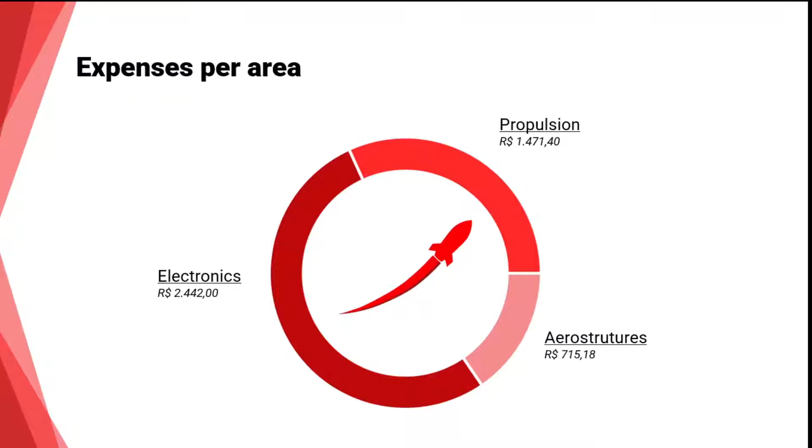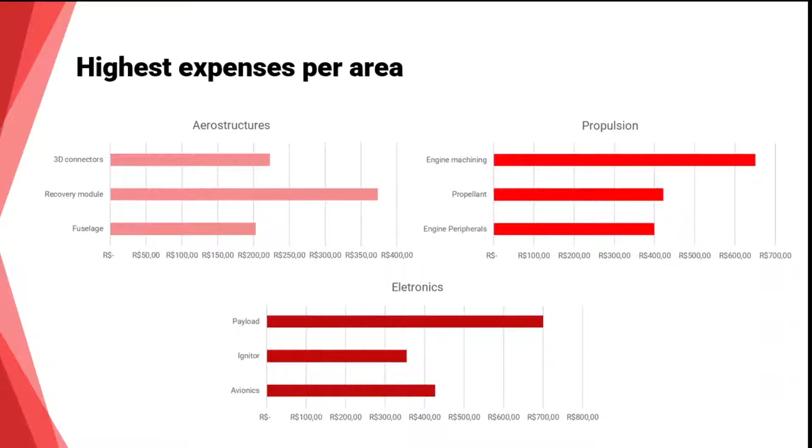The following graphics detail the biggest expenses per area: in aerostructures, recovery module, 3D connectors, and fuselage; in electronics, payload, avionics, and igniter; and in propulsion, engine machining, propellant, and engine peripherals.

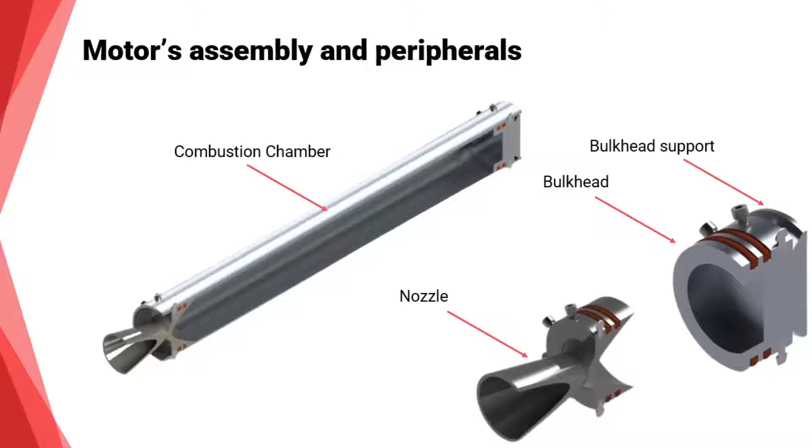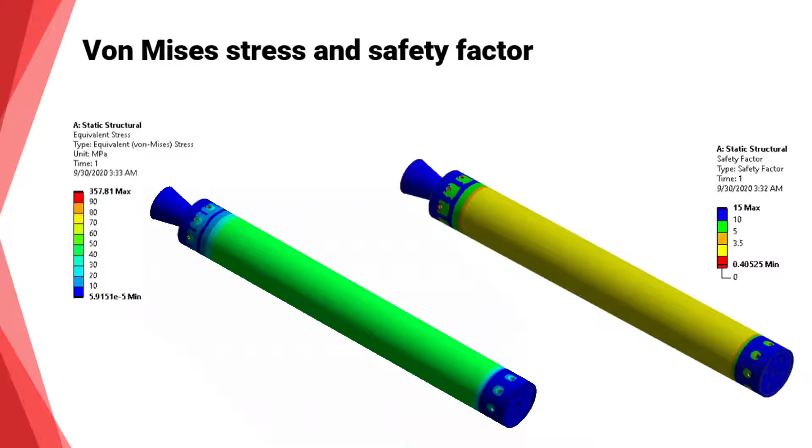In order to know the chamber's strength, a structural simulation was made. The results obtained were a von Mises stress of 49 megapascal in the chamber center, resulting in an average safety factor of 2.5 for maximum motor load analysis and considering internal pressure as 1.5 times the nominal.

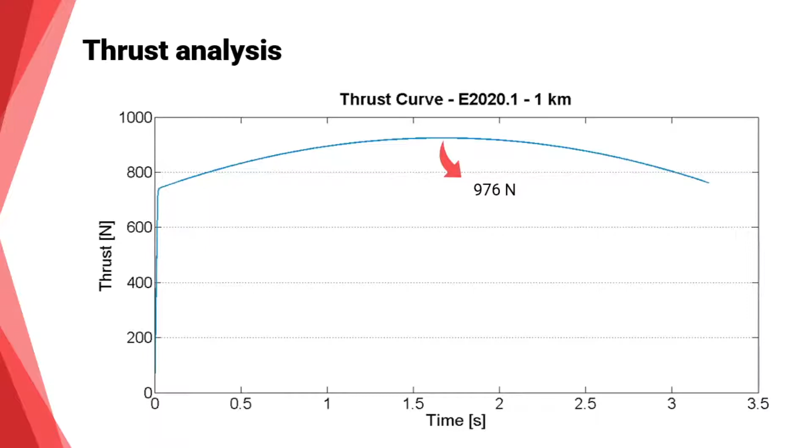The maximum thrust is 976 newtons, with an average thrust of 950 newtons and total impulse of 2,942 newton-seconds, thus a Class L motor. The maximum pressure found was 2.45 megapascal.

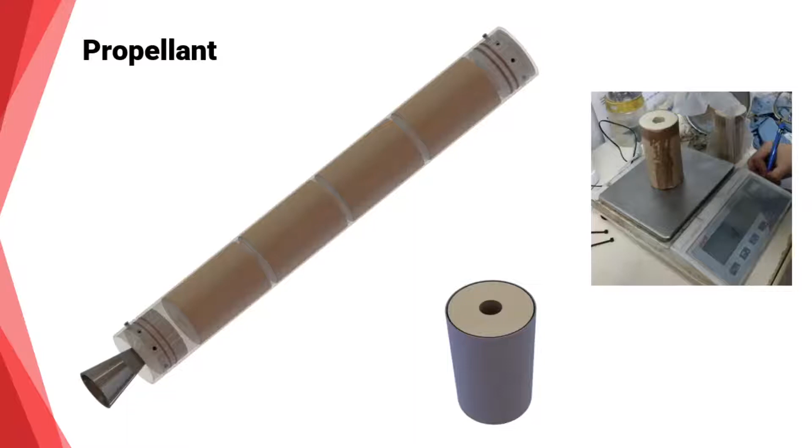The rocket has 4 grains, all with composition of 65% potassium nitrate and 35% monohydrate dextrose. This percentage is corrected by the factor 1.1 in mass due to hydration. The external face is inhibited with a cotton cloth and epoxy resin. The combustion chamber also has a thermal insulation element based on kraft paper.

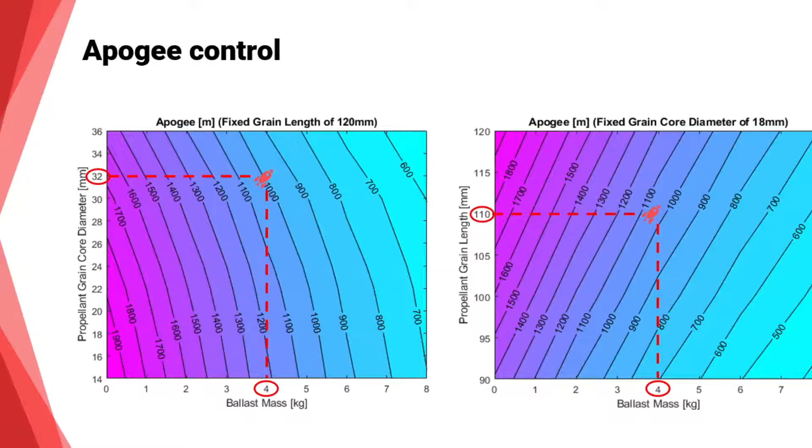A parametric study was carried out using OpenRocket and it was concluded that for 1 kilometer apogee, each grain has 110 mm length, 66 mm of external diameter, and 18 mm for core diameter, with a boilerplate payload of 4 kilos.

The team is at the beginning of the test schedule, with results just for a half-charge motor. The results for the first test were satisfactory, occurring without anomalies and demonstrating the combustion chamber's structural integrity. In this test, we used kraft paper as inhibitor.

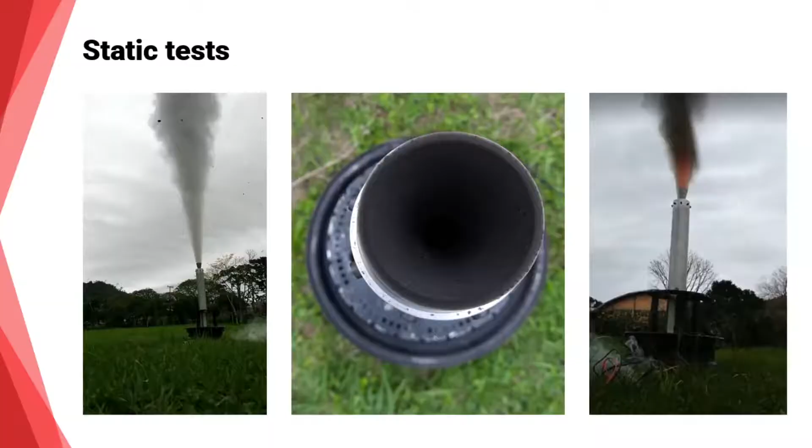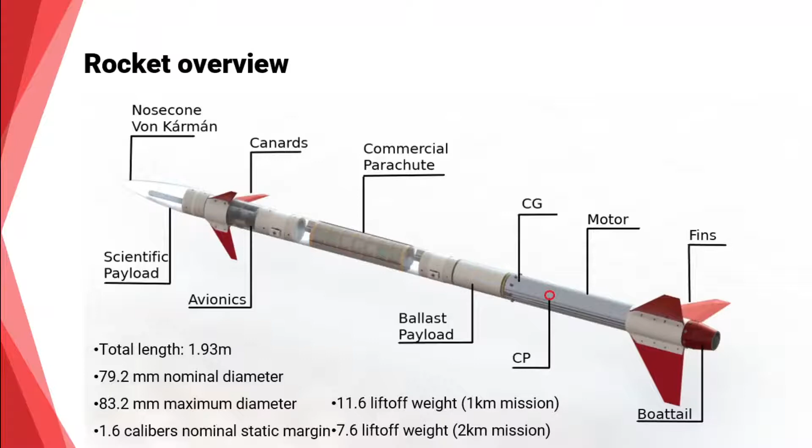A nominal static margin of 1.6 calibers was achieved with the help of 3 fins and 3 canards. The canards were chosen to reduce the static margin variation and improve the damping ratio, while combined with the main fins, maintaining a safe minimal static margin. The majority of its mass is concentrated in the propulsion module.

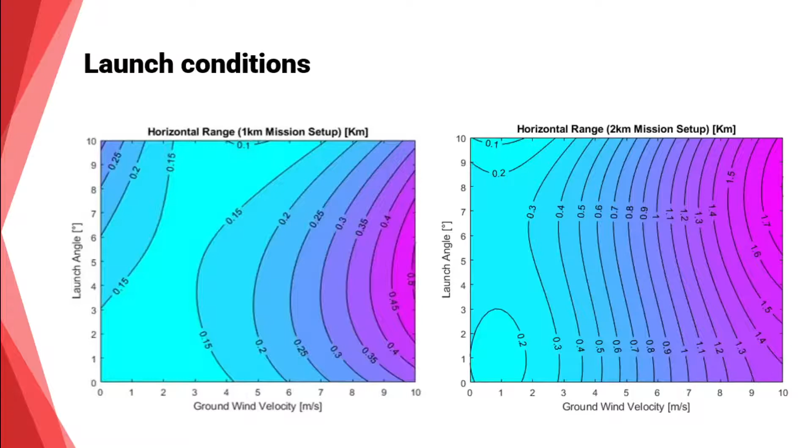The rocket's stability and flight mechanics were evaluated for different launch angles and wind velocities. The critical environmental conditions were obtained for both rocket configurations, maintaining an acceptable horizontal range and safe liftoff static margin of around 1.6 calibers. Statistical Monte Carlo trajectory simulations allow the team to know the spread of the landing locations and establish a safe perimeter around the launch site.

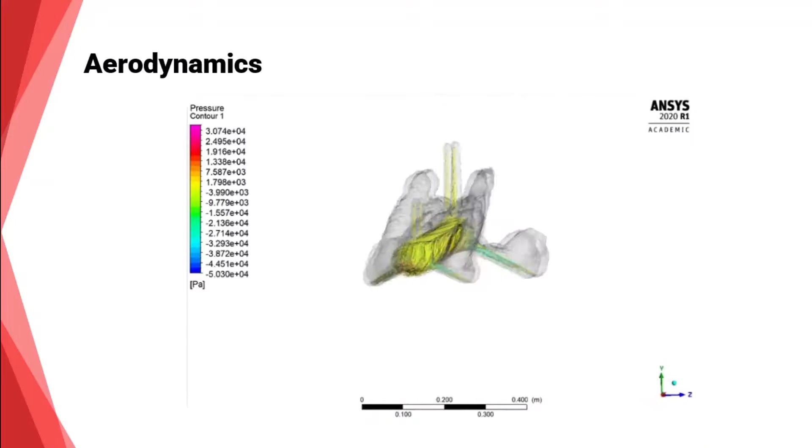Safety analyses were performed for different aerodynamical conditions using ANSYS Fluent. The different proposed fin set configurations were compared to determine a minimal drag fin design. The rocket's drag coefficient and the static margin could also be determined, validating OpenRocket simulations.

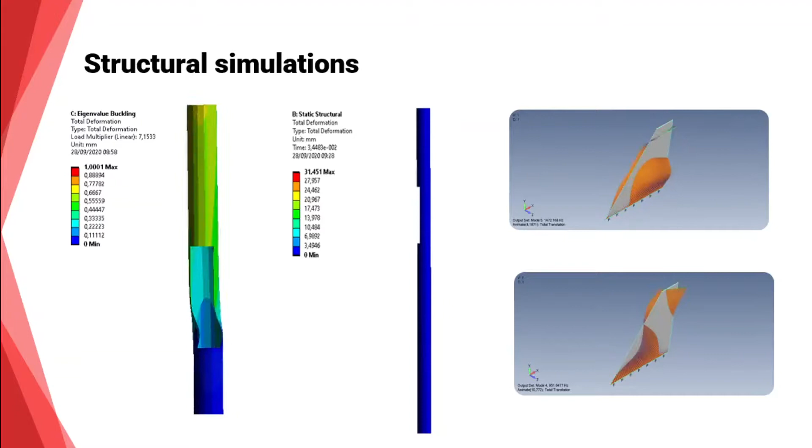The rocket's fuselage was laminated with fiberglass and epoxy, as well as the fin set, boat tail and nose cone. Several simulations were necessary to evaluate the parts under maximal aerodynamical and pressure loading and maximal thermal loading due to the motor. Aeroelasticity simulations were also carried out to foresee further critical conditions.

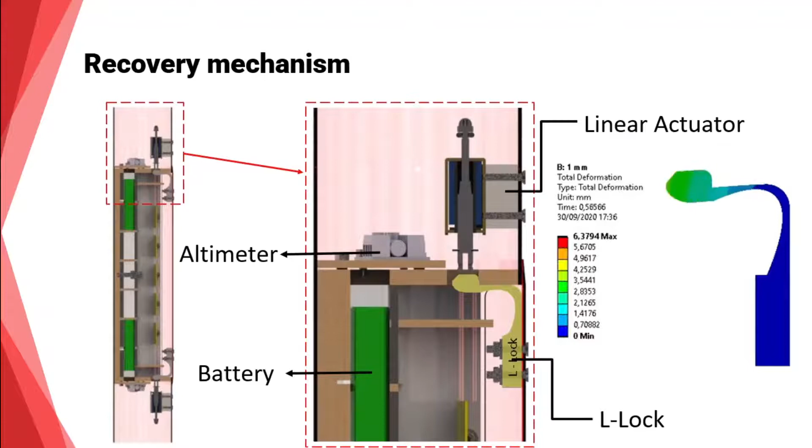The recovery mechanism is mechanically actuated, and the structure is reinforced with balsa wood and a PVC structure built to absorb and reduce the stress caused by the parachute lateral cut. The altitude data is managed by the altimeter. When the target value of 400 meters of the 1 kilometer mission is captured, the initialization of the recovery system starts.

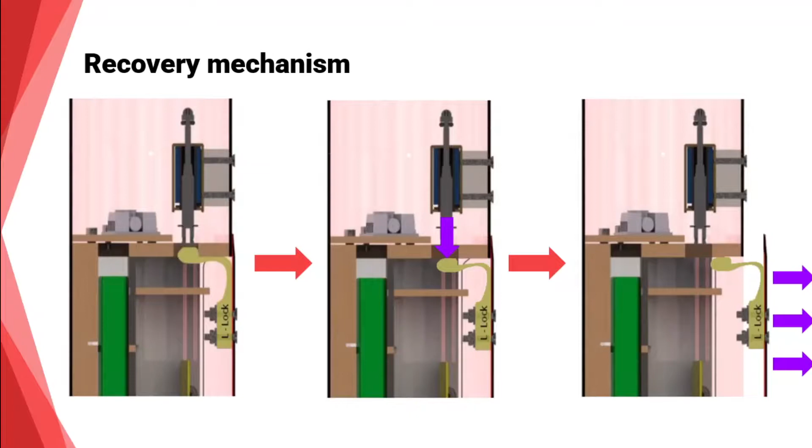A direct current electrical signal is sent to the linear actuator, releasing the L-lock. The parachute hatch is then ejected due to elastic bands that push the parachute upward. This system is actually symmetrical and redundant. It is built using 2 identical systems containing an altimeter, battery, and an actuator that do not communicate with each other in any way. In addition to that, the system is designed to work even if one of the L-locks is not released for some reason.

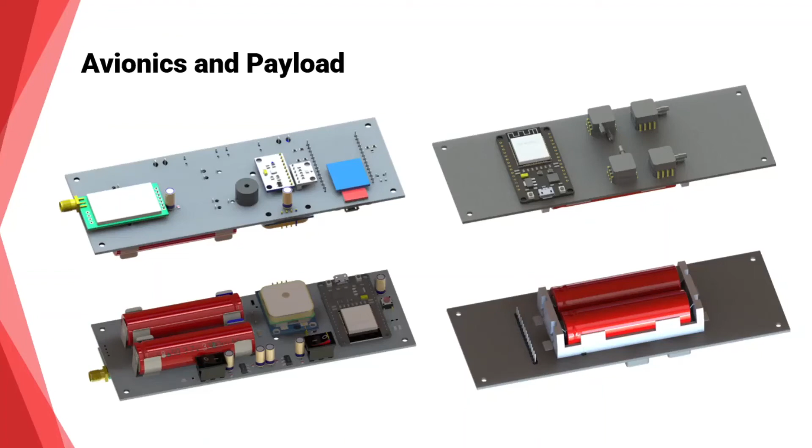The other side of the avionics board holds the MPU, a 3-axis gyroscope and accelerometer, the BME sensor used for measuring barometric pressure, temperature, and humidity, the 1 watt LoRa for transmitting real-time vital data, and the microSD for data logging, as well as a buzzer for sound feedback.